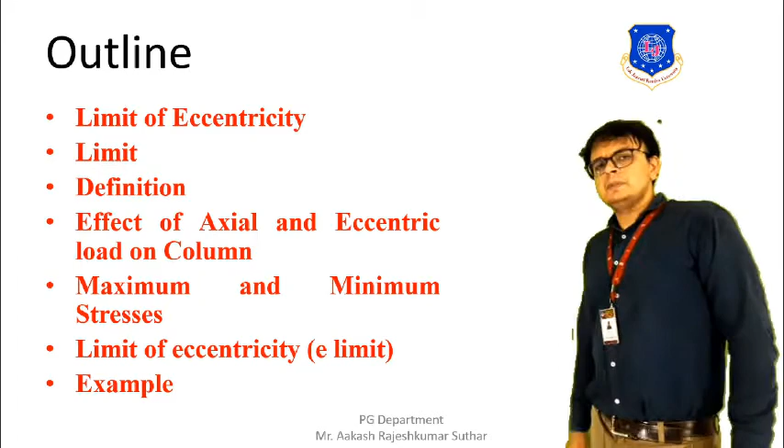So, starting with the first, that is the limit of eccentricity. When an eccentric load is acting on the column, it produces both the direct stress and the bending stress. On one side of the neutral axis there will be the maximum stress, and on the other side of the neutral axis, below it, there will be the minimum stress. So this is the characteristic of the eccentricity.

Whenever the load is acting on the column in an eccentric way, it will be causing both the direct stress and the bending stress. Above the neutral axis, on one side, it will be having the maximum stresses, and below the neutral axis we will be having the minimum stress.

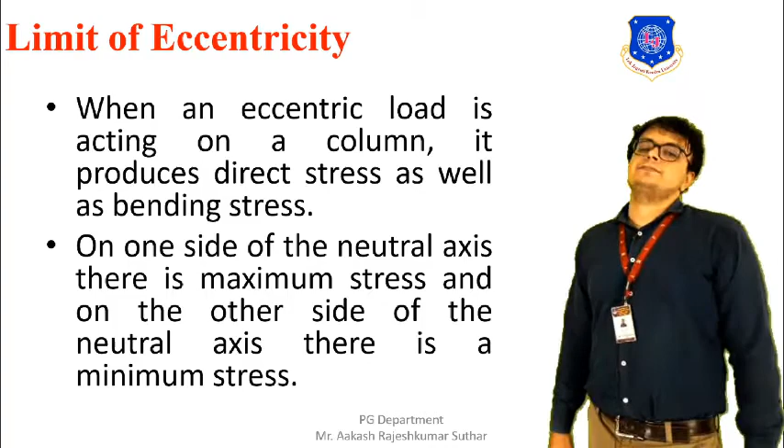Now, limit of eccentricity: a little consideration will show that so long as the bending stress remains less than the direct stress, the resultant stress will be compressive. Whenever the bending stress is less than the direct stress, the resultant stress will be compressive. If the bending stress is equal to the direct stress, meaning sigma B is equal to sigma D, then there will be a tensile stress on one side.

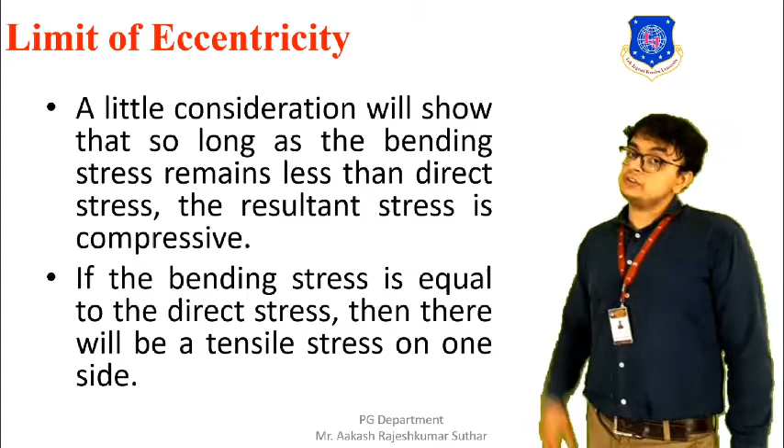Further, though cement concrete can take up a small tensile stress, yet it is desirable that no tensile stress should come into play. So, though it can take a little tensile stress, it is desirable that no tensile stress is required to be taken by the concrete.

The formula you can see over here. The formula of eccentricity will be e should be less than Z by A. This condition is that the eccentricity should be less than Z by A. It means that for a no tension condition, the eccentricity should be either less than Z by A, or at maximum equal to Z by A.

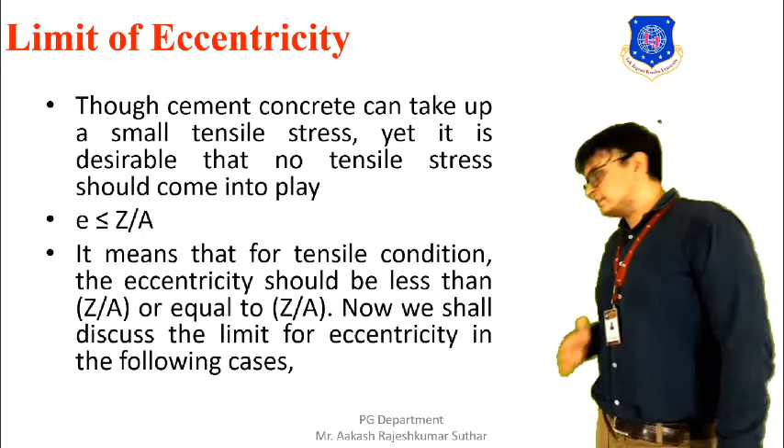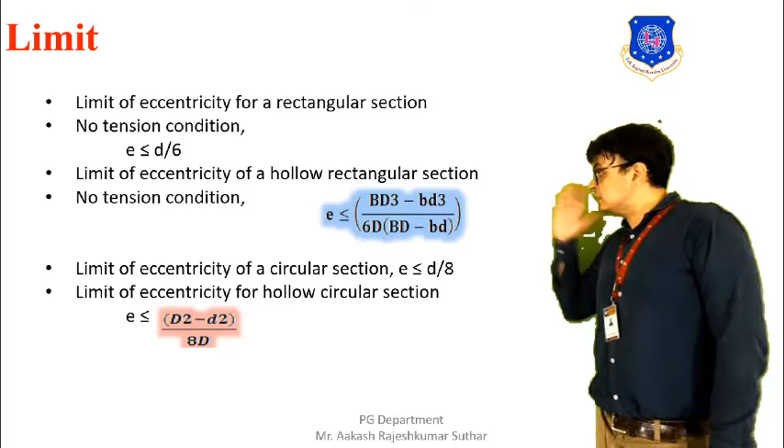Now, we shall discuss the eccentricity limit in the following conditions. For different cases, the condition for the eccentricity will be different. So let's discuss these different conditions. If we have a rectangular section, then for no tension condition, its eccentricity should be less than or equal to D by 6. So for a rectangular section, if we want no tension, the e value should be less than or equal to D by 6.

If we have a hollow rectangular section, capital B is the outer dimension and small b is the inner dimension. Capital D will be the outside dimension and small d will be the inner dimension. So there will be a space, a hollow section.

If we want a condition where no tension takes place, then our e value should be less than or equal to capital BD cube minus small bd cube upon 6 capital D into the bracket of capital B into capital D minus small b into small d. We have to satisfy this condition, and only then will we get a no tension condition in a hollow rectangular section having width capital B outside and small b inside, and depth capital D outside and small d inside.

Now moving towards the circular section. If we want no tension condition in a circular section, then in that case our eccentricity condition should be such that it is less than or equal to d by 8. So it is required to be satisfied. After that only we will be getting a no tension condition.

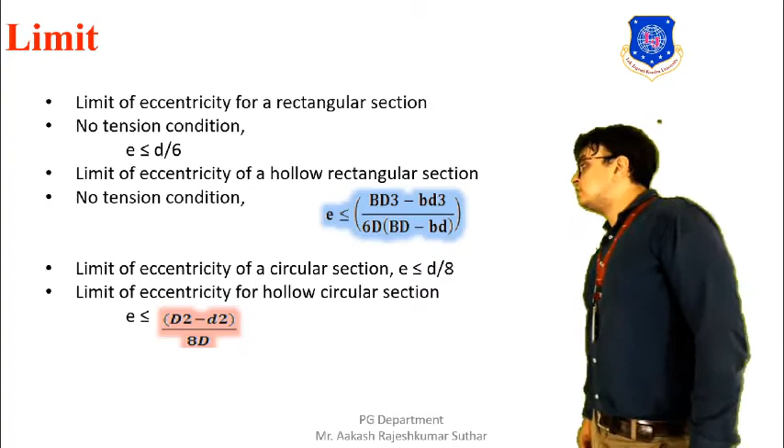After that, if we are having a hollow circular section and we want to satisfy the no tension condition in that particular hollow circular section, then in that case the condition that is required to be satisfied will be e should be less than or equal to (D² + d²) divided by 8D. Okay. So that is required to be followed.

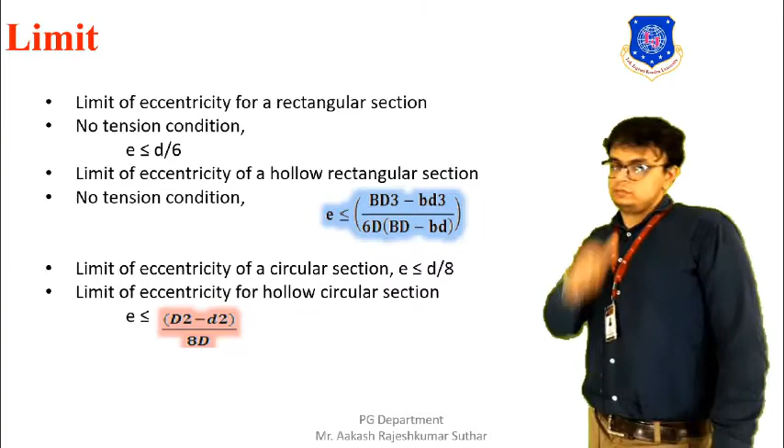Now let's discuss some definitions. So first definition is the axial load. When a load is acting along the longitudinal axis of a column, then it will be termed as the axial load. Mainly, the axial load will be producing the compressive stress in the column. Okay.

Next is eccentric load. So when a load whose line of action does not coincide with the axis of the column, then it will be producing the direct and the bending stress. And the load behind this direct and bending stress will be the eccentric load. Now we have discussed the eccentric load. From this there will be an important term, that is the eccentricity, denoted by small e.

It is nothing but a horizontal distance between the longitudinal axis of the column and the line of action of the load. So between the point at which the load is acting and the location at which the centroid is located, there will be some horizontal distance. That distance will be termed as the eccentricity. And talking about an axially loaded column, its e value will be equal to 0. Okay. So this is the condition which we will be taking.

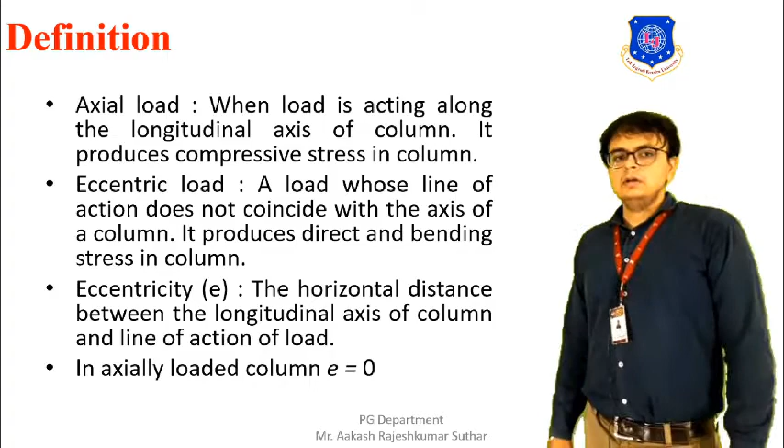So whenever this axial loading is acting on it, if we draw the stress diagram, we will only have the direct stress. So direct stress here is denoted by sigma 0. So it will be P by A. So whenever the axial load is acting on the column, only the direct stress will be acting. But if we are having some eccentricity, then the condition will be different. If we do not have this eccentricity, then there will not be any kind of bending stress. No bending stress will be formed, and ultimately the resultant stress will be equal to the direct stress only.

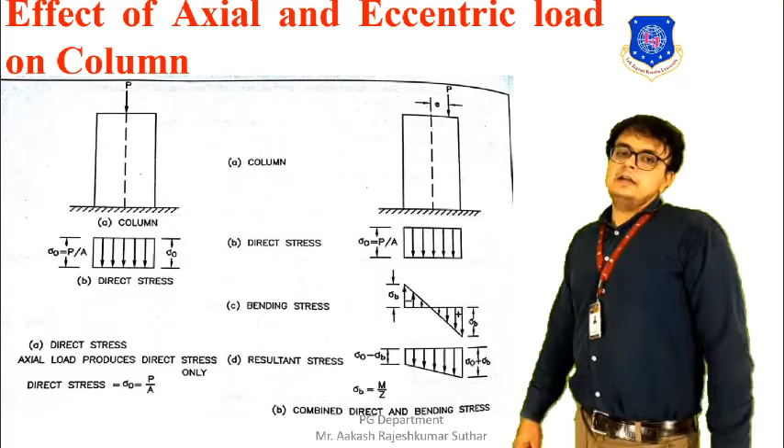Okay. So yes, we have a short column that is being subjected to the axial load, which is nothing but a compressive force. So because of this, we will only be having a direct stress. The direct stress will be equal to sigma 0, that is equal to P by A.

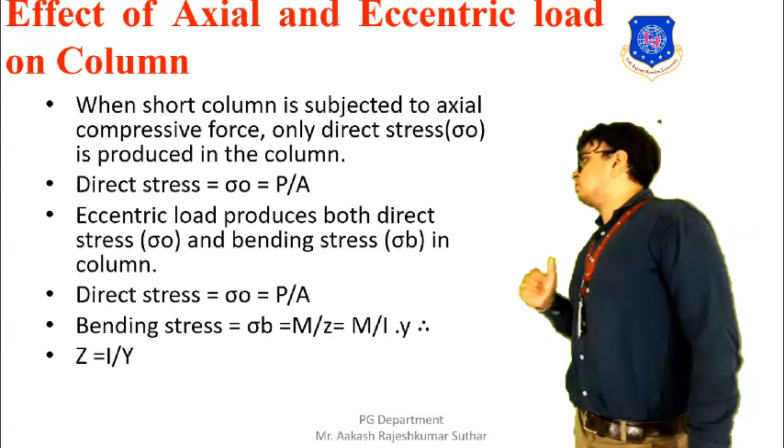Okay. So you can see over here. Now at the same time, when we are having this eccentric load acting onto our structure, whenever this eccentric load is acting, we will be having the bending stress. It's denoted by sigma B. So sigma B will be acting when the eccentric load is acting. So under the resultant stress, we have to consider both. The direct stress here is P by A, and bending stress will be M by Z. That is required to be taken into consideration.

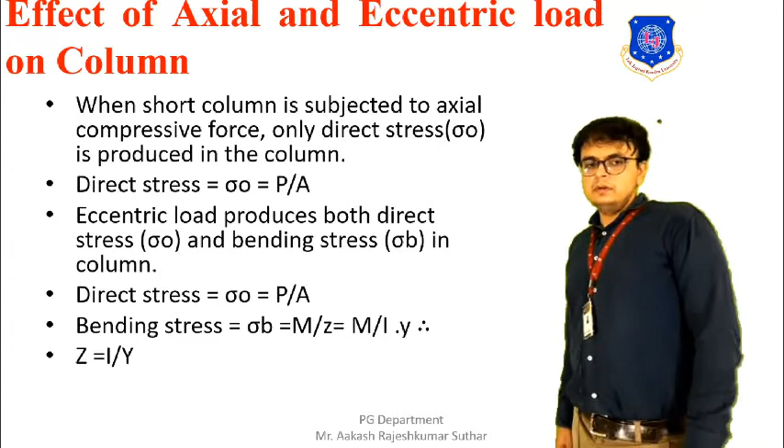Sigma is equal to M by Z. Z is equal to I by Y. So ultimately we can say that it will be equal to M into Y by I. Okay. So this is the thing that is required to be discussed.

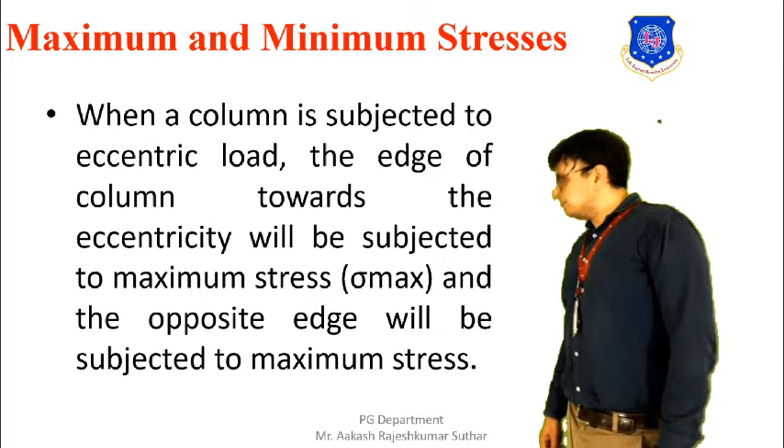So we can say that the edge adjacent to the eccentric load will be having sigma 0 plus sigma B. But on the other side, where the stress is not acting, at that point our resultant stress will be the minimum stress, and that will be equal to sigma 0 minus sigma B. So this is what I wanted to show.

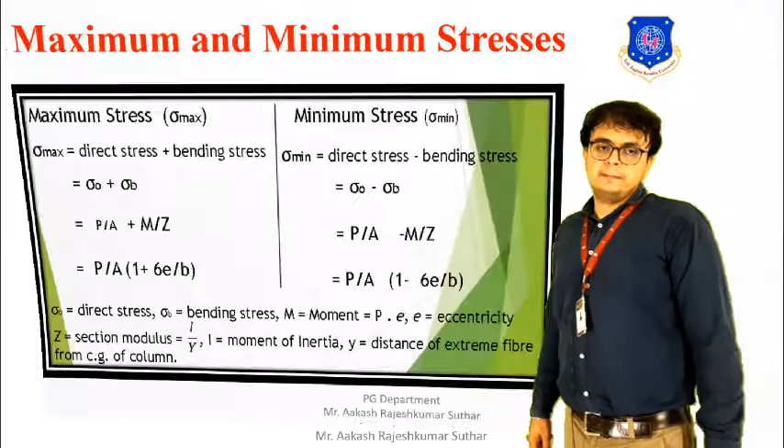You can see the condition in maximum stress, denoted by sigma max. There it will be equal to direct stress plus bending stress, means sigma 0 plus sigma B. Sigma 0 will be equal to P by A, and sigma B will be M by Z. So if we are solving this equation, we will be getting a precise formula that will be equal to P by A whole bracket 1 plus 6E by B. Okay, so this is the thing.

And if we are talking about the minimum stress, then its formula will be sigma 0 minus sigma B, that is P by A minus M by Z. So on finally solving this equation, we will be getting the formula of P by A into whole bracket 1 minus 6E by B.

There sigma 0 is the direct stress, sigma B is the bending stress, M is the moment, E is the eccentricity, and moment here the formula will be P into E. Means the axial load P into the eccentricity E. So that is the moment. Z is the section modulus, that will be equal to I by Y, where I is the moment of inertia and Y is the distance of the extreme fiber from the center of gravity of the column. So these are all the parameters which each term designates. Okay.

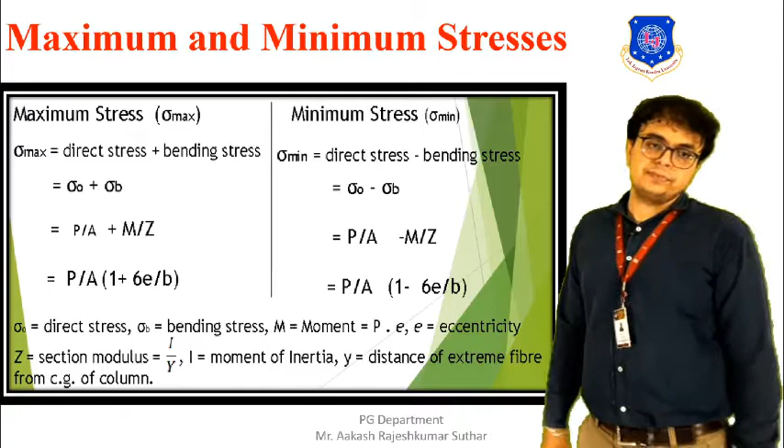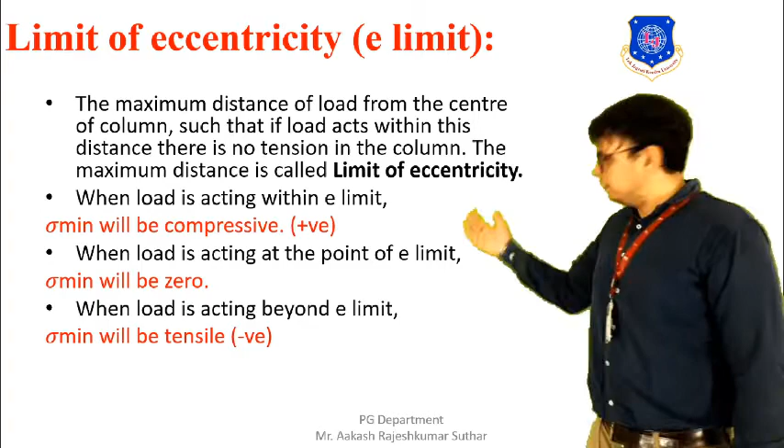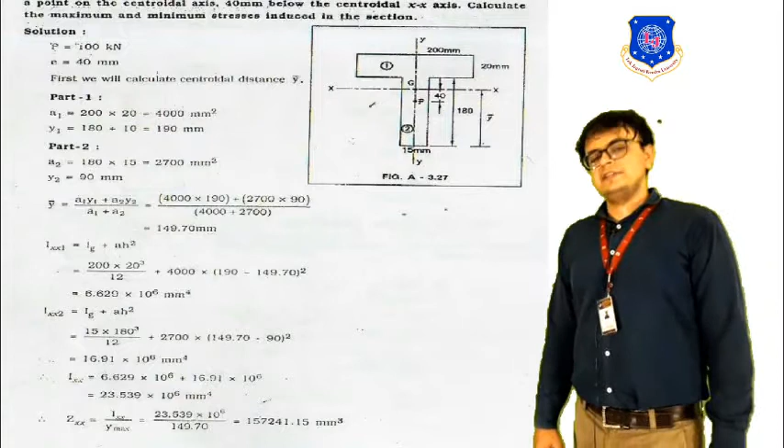This is an example that we will be solving in the next session. So we are keeping up to this only in this session. See you in the next session. So here we are ending our session. Hope you have liked the session. We have discussed each and every topic in brief and also in detail. We have discussed each topic's practical application also.